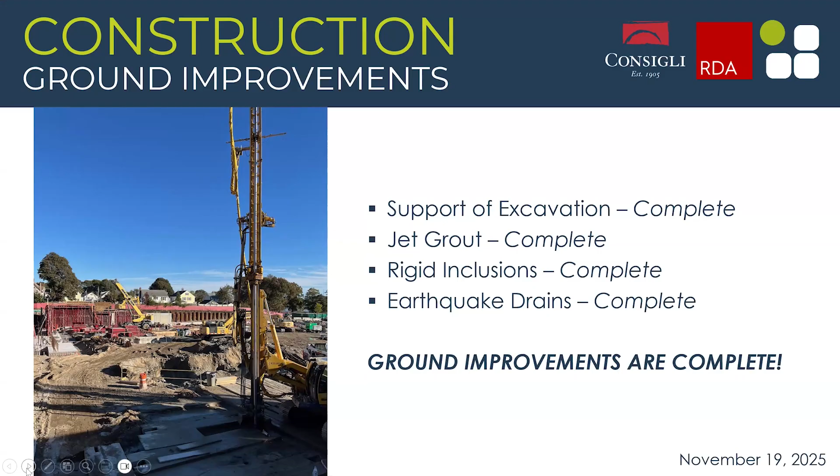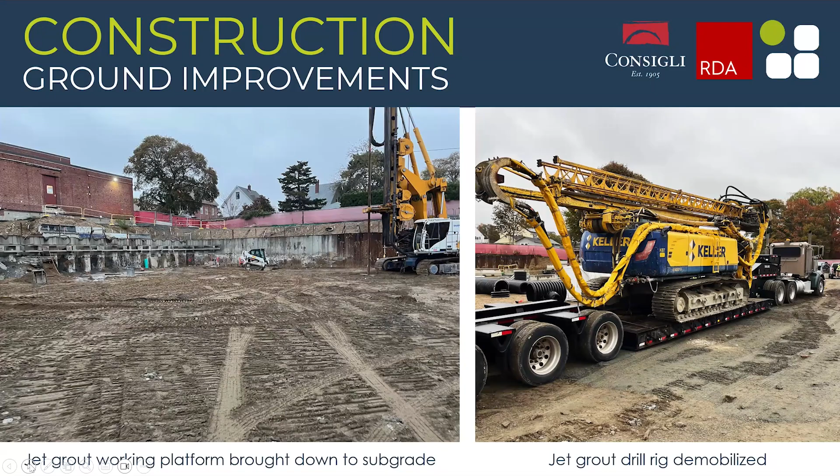These are a couple photos of, on the right, that jet grout rig being demobilized. That's now completely off site. On the left side, we had cut out the working platform that all that jet grout was installed at, brought it back down to the platform elevation needed to install the handful of rigid inclusions and EQ drains that we had left off in that jet grout area during the initial mobilization. That's since been completed as well. So both rigs in these photos are now off site, which is fantastic for us.

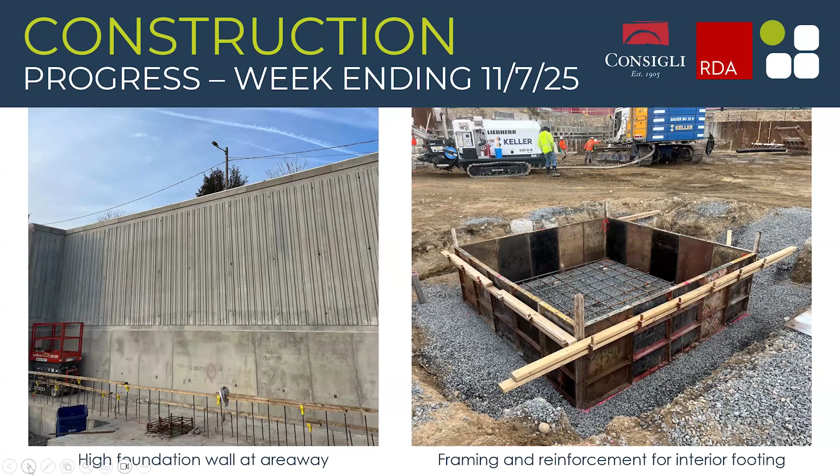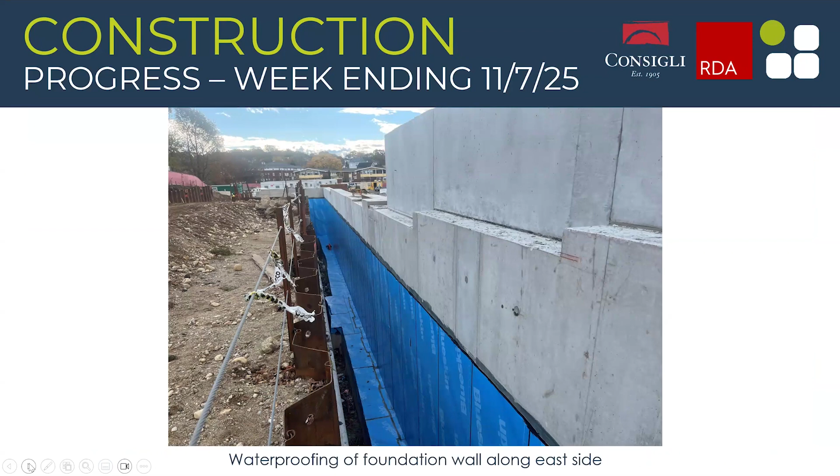We've also mobilized with the waterproofer. We've completed the waterproofing on the east side of the high wall between the sheet piles and the backside of that foundation wall. This has been done. The rep for the manufacturer of the product came out, inspected, and we're getting a report, but they were happy with the install. This allows us to get our drainage mat in, put our insulation in, and then actually start backfilling, which is another great step for us.

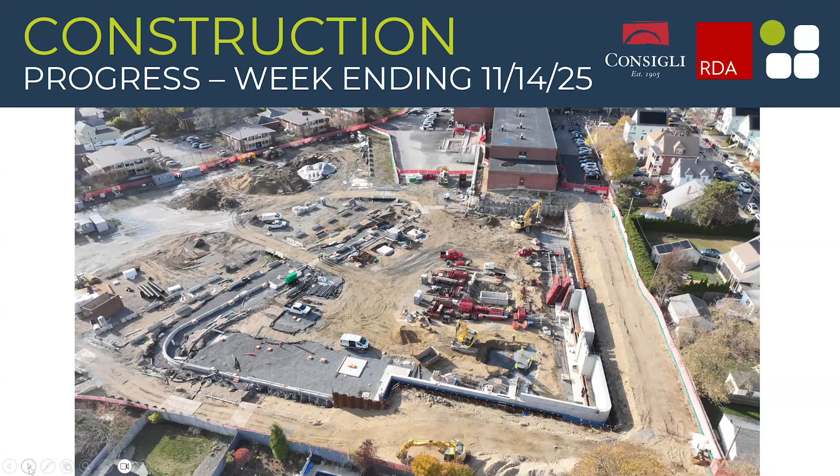You'll see some crane work happening, I believe the week after next. You'll see that crane back out, setting more formwork to do the rest of the high walls as we work out the rest of the concrete, to be done mid to end of December to be ready for steel.

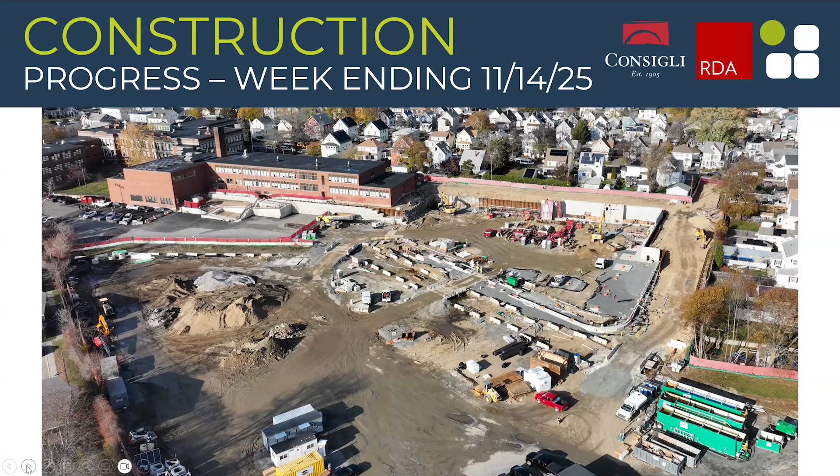We had a great site visit with the carpentry students from Lynn Tech. Something we've been working behind the scenes with the principal and guidance counselor there. Last Friday they came out, about 40 kids, with some fantastic questions. They had a chance to speak to a couple folks, our team, the Leftfield team, as well as some carpenters on site doing concrete work. I think it was great for them. We'll continue to do that.

Our next one is going to be in January with the metal fabrication kids. Once we get structural steel out there, we'll do the same thing, get a chance to talk to an iron worker, kind of see what their path was, what life was like to get to where they are. I think that was great.

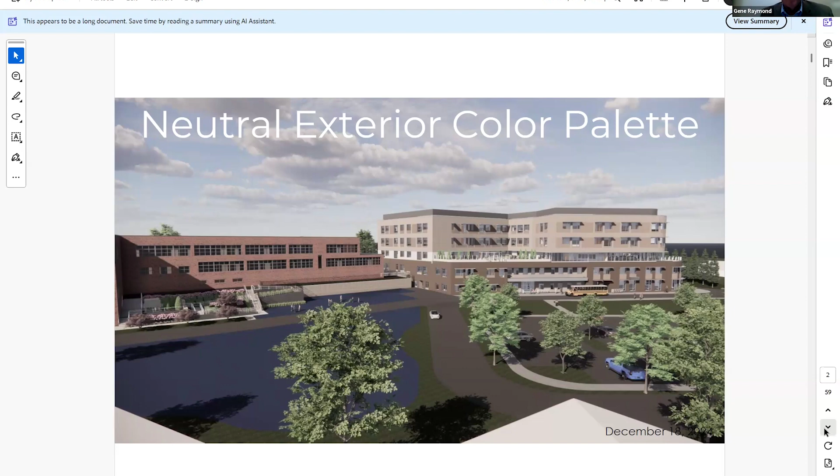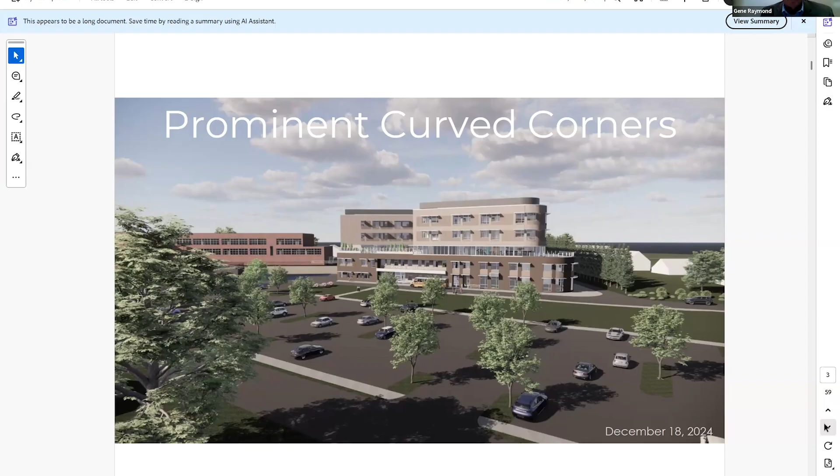If you go to the next slide, Lynn, you can recall from these exterior images or floor plans, the site lent itself to an L-shaped upper 3 levels, but we had corners we didn't want to have a big pointy prow on, so we curved the corners that overlook Flax Pond.

The outside is fairly neutral, as I said. The inside, we have most of the learning spaces around the perimeter of the building with windows and natural light. We have these cores in the middle of the building, and what we decided was to keep most of the hallways neutral, which you'll see in the slides as far as wall finishes.

But on these cores, we really emphasize that there are different cores. We have a 5-story building, and by using different colors we'll help people navigate the building. Obviously they'll know where they're going after a while, but we're trying to break down this big building into smaller pieces.

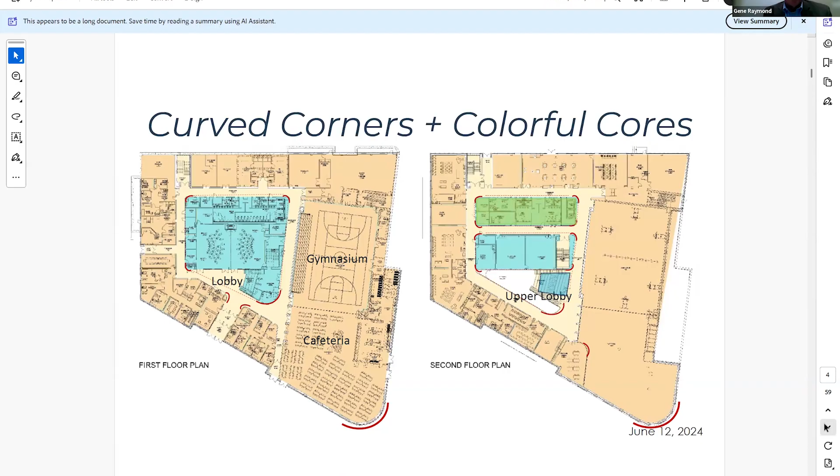So these are the first 2 floor plans, and you can see these different cores inside the building. You can also see these red semicircles. We don't have a lot of sharp corners; we've rounded the inside cores just like we rounded the prow overlooking Flax Pond. Next slide.

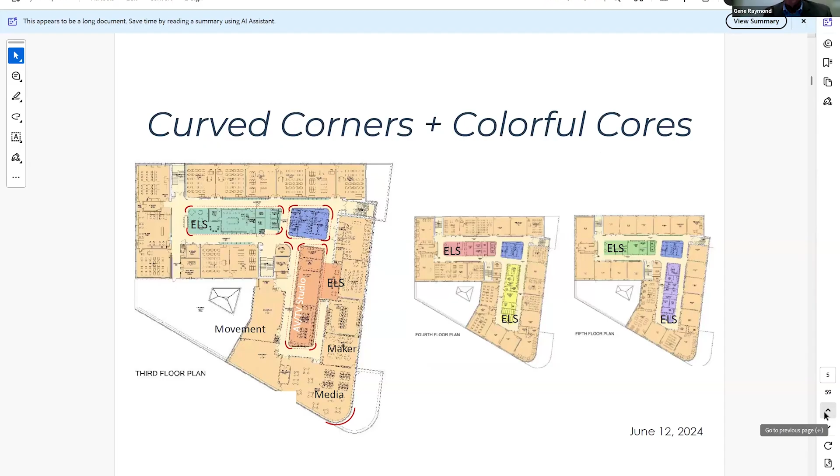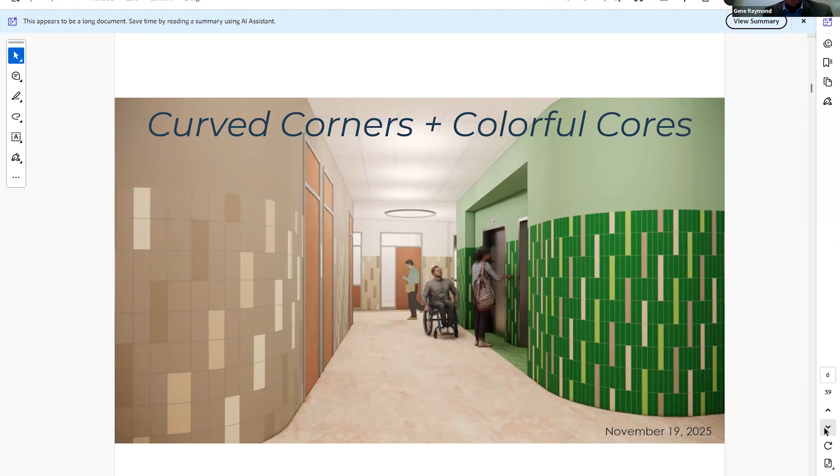On the left side, we have these toilet cores that stack on the upper 3 floors, and the wall at the back is a neutral tile color palette. The floors we've kept neutral also, because we're really trying to emphasize these interior cores, having different ones on different floors so people have their own identity and know where they are. You can see the rounded corners on the left and right in this picture.

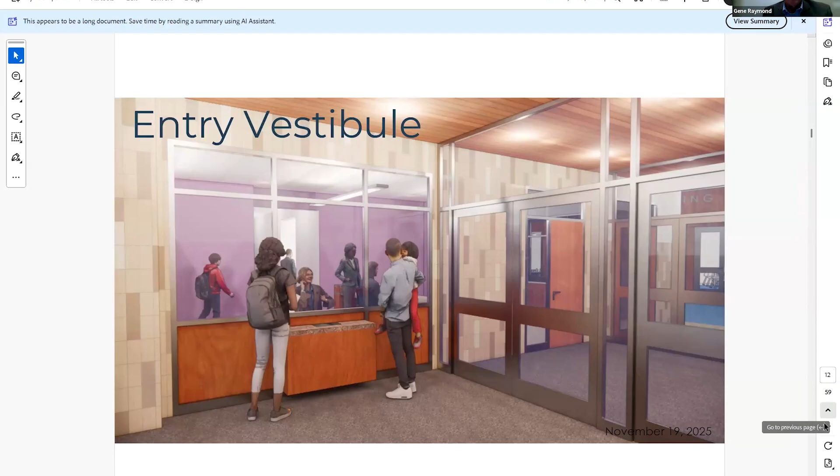You're going to see a lot of these blackboards, and I'm not going to go through every one in detail, but on the left side, going up and down in the vestibules, there's a wall-to-wall walk-off mat to knock dirt off your feet before you get into the school. We have that full height neutral tile pattern, and at the top, those linear metal planks.

I guess the stairs are on the right. We don't have any images of the stairwells, but they'll be very similar to what we did at Thurgood Marshall, which is ground face concrete block on the walls, very durable, stainless steel handrails so you don't have to worry about repainting, and rubber flooring for treads and risers. You could go to the next one, Lynn.

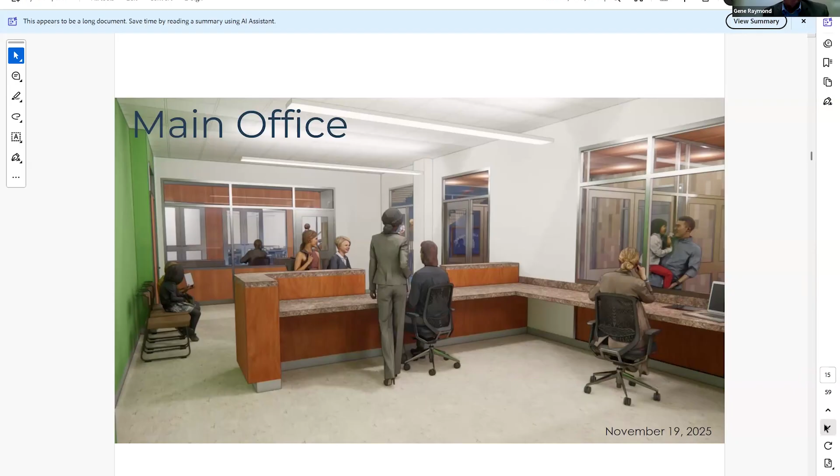If you were buzzed in, the door to the main office from the vestibule is on the left. But if you proceed straight, you're coming into the main lobby. For this, we thought the most appropriate calming color was blue, so this core in the main lobby is going to be blue.

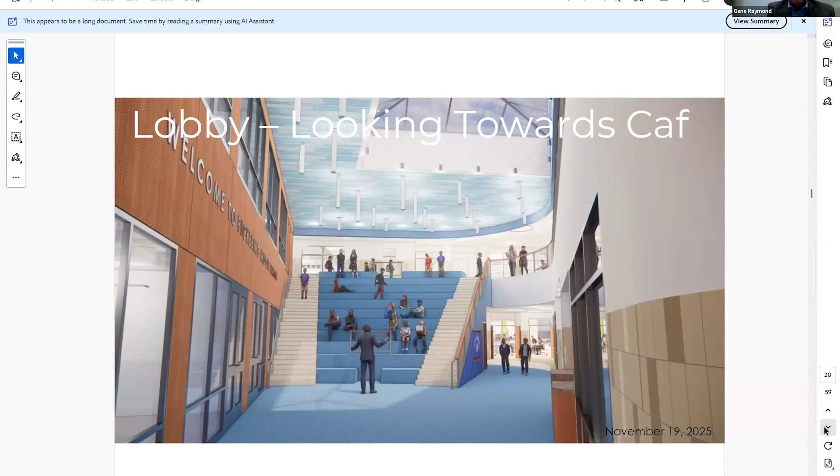So this is another view of it, at the learning stair. It's a 2-story high space in the lobby with a big skylight. On the right side you can see the neutral wall tile, but then between that and the stair, you're looking down the hallway toward the cafeteria.

The planks — when we have one of these colorful cores, in this case a blue core, we're using a lot of blue, but we didn't want the ceilings to just be one tone of blue and fairly uninteresting. So these metal planks will all be painted in a series of three different blues, and when we get to a green core, there'll be three different hues of green.

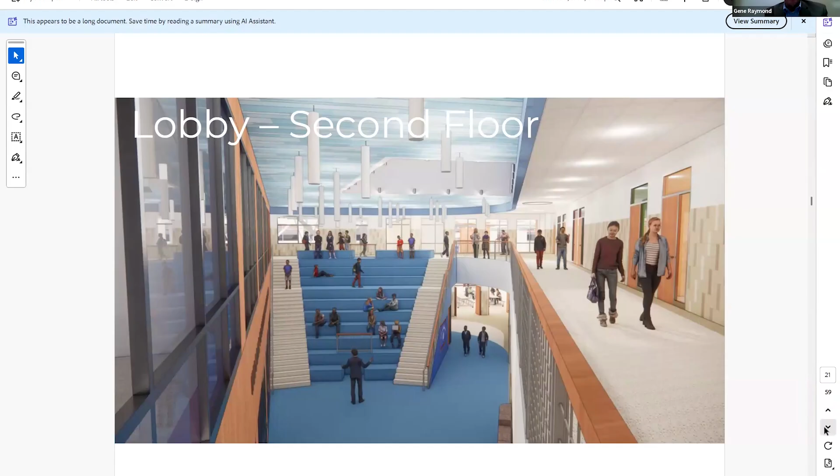This is the upper floor, upper lobby. Everything you're looking at, the neutral colors on the floors, is all terrazzo. So all the walking surfaces in the public areas on the first and second floor are this terrazzo.

You can see you've reached the top of the learning stair. You could go down to the first floor, or either way, left or right, head down a corridor. You can see wall tiles, blue on the colorful core, and neutral tiles to the left there.

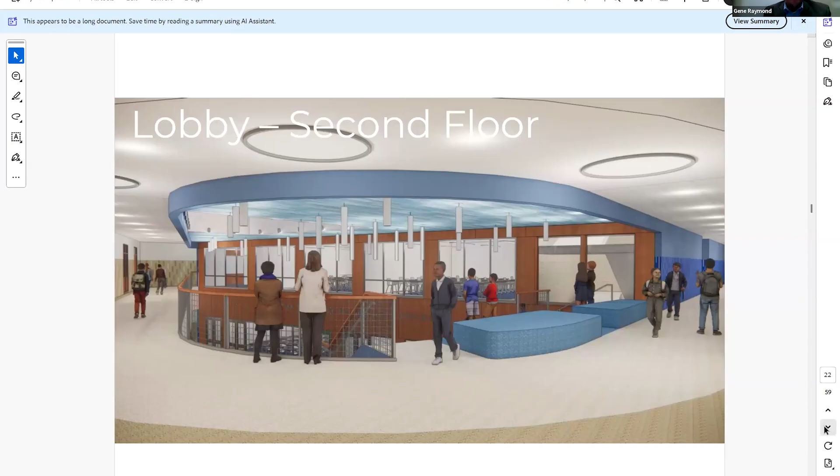So where we were standing at the top of the learning stair, which is on the left, there's windows that look down into the cafeteria. And if you went down the hallway where those kids are, there's windows that also look down into the gymnasium. What everyone is walking on is terrazzo, and all the tile on the wall goes up 6 feet. So everything you can touch is very, very durable.

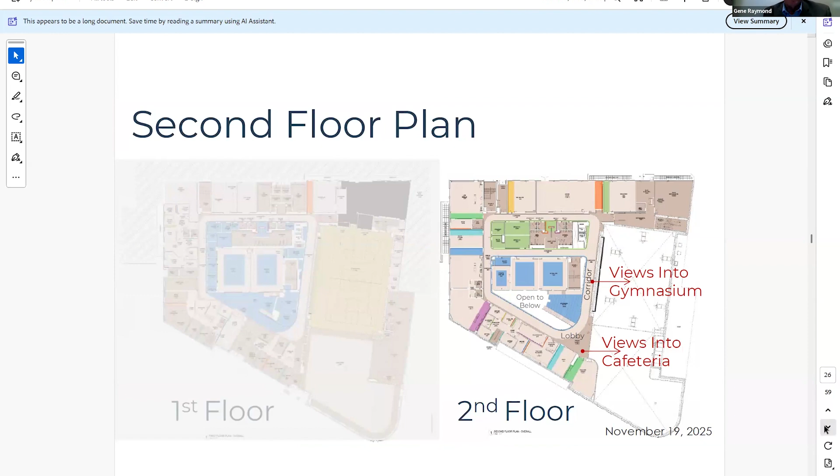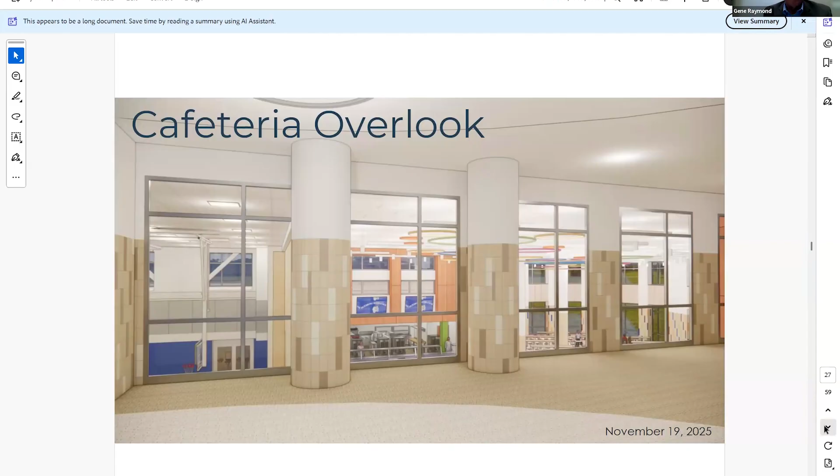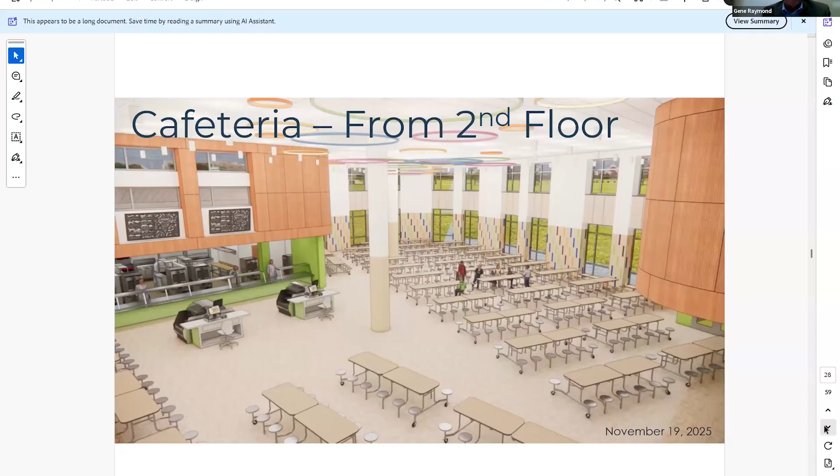I just wanted to point out the next two slides are going to be a view into the cafeteria from the second floor, and then a view into the gymnasium. This is what you'd see if you came up to the top of the learning stairs and looked straight ahead—you're in this upper lobby area. If you approach those windows, you'd be looking down into the cafeteria. And further down the hallway, you'd be looking down into the gymnasium.

So the gymnasium—we will work with the district on what color game lines are and how they want them arranged, but it's a maple floor. There are blue plastic bleachers on the left side, and the blue band that goes around the edge is either going to be a cherry door that looks like wood, or a full height wall pad.

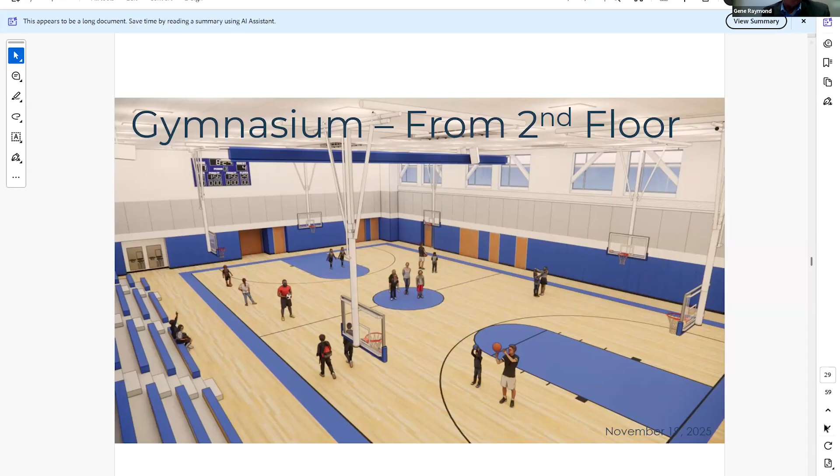Really, there's the wall pads of vinyl. The bleachers are hard plastic, like Thurgood Marshall.

It gets very repetitive, so I won't spend a lot of time on these, but this is the gym when it's being used as a gymnasium. Above the blue wall pads, there's a white band around the edge—that's all cement panel acoustic panels. They're very rugged, but we have acoustic ceiling tiles in the ceiling too. We have those on the wall, so the idea is that we don't want a lot of sound bouncing around. We want to be able to hear ourselves talk when we're in the gym.

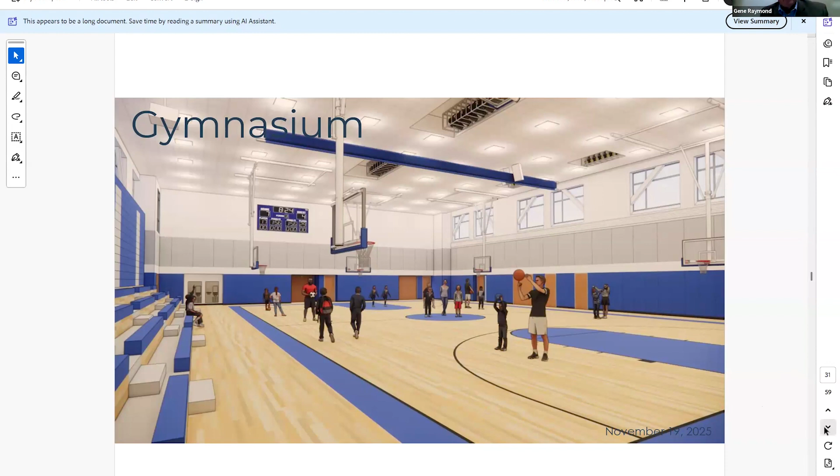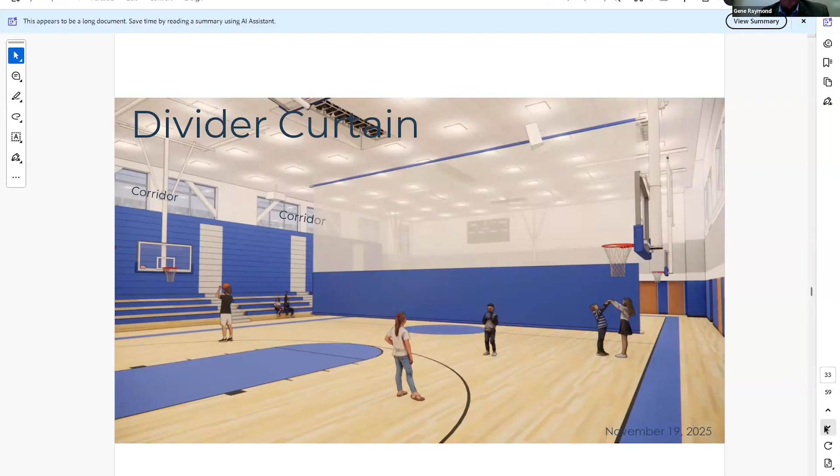There's a drop down curtain that will divide it into two sections, if you have two sections of phys ed. From the same area in the gym—we don't have a stage in the cafeteria. We use the gym and put a lot of bleacher seating and then room for floor seating.

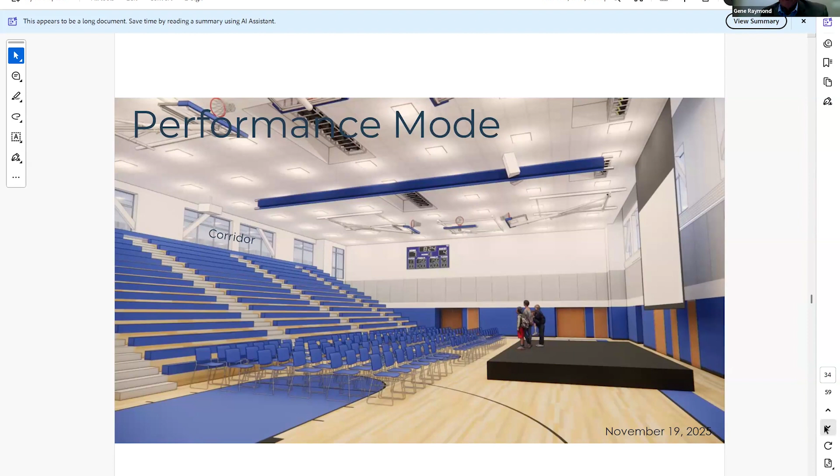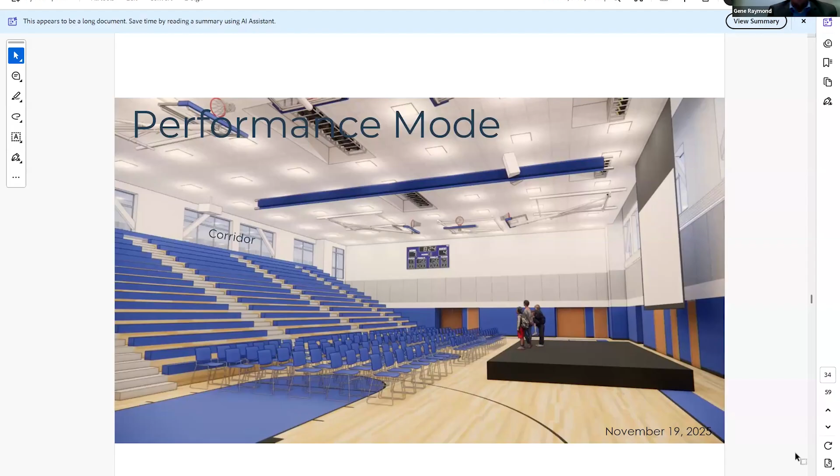There'd be a portable platform, which is that black rectangle on the right side. There's a projection screen that would come down, and a very heavy duty projector over by the corridor windows. Up in the ceiling, those black rectangles are all the theatrical lighting. So we're using the gym as the large performance space in the school, and that's why we have so many bleachers.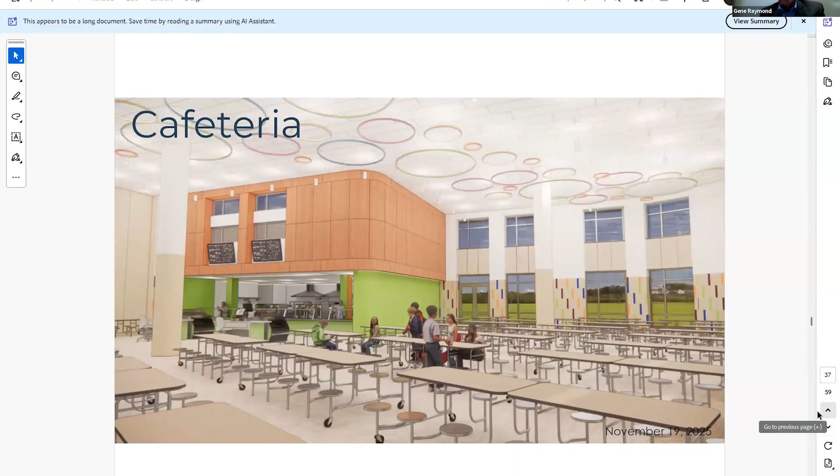If you're looking back toward the lobby, we also have a roll down screen here, and there's a projector here so that the cafeteria can be used for more than just eating—it could be used for smaller presentations.

On the right side, it's hard to see behind the column, but if you see the word lobby, to the right of that is a folding partition. It's tall and long, and it can be opened. If you do open it, you'll have just a big, huge space between the gymnasium and the cafeteria. So for a big community event, you have the cafeteria option, the gymnasium option, or you could combine both rooms into a large open space.

When we get to the upper floors, anytime you see the letters ELS, it stands for Extended Learning Space. It's pretty much corridor space, not enclosed. The corridor just kind of expands into this open space where group projects or pull-out services could be provided.

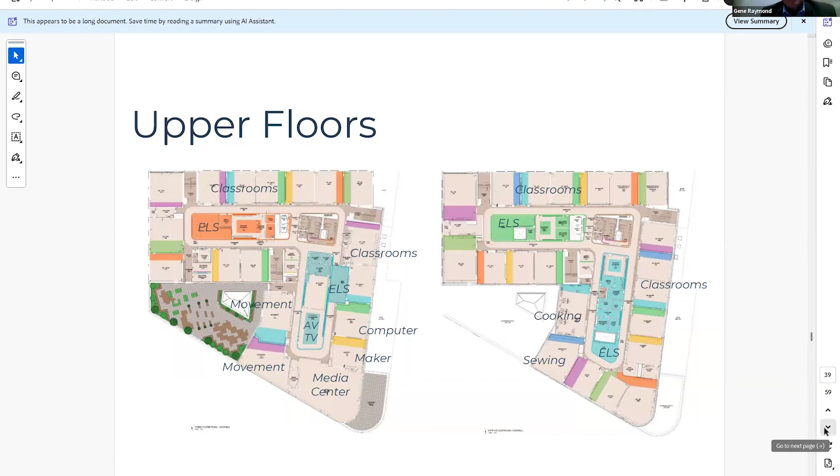We'll show you pictures of those, but those are all the color cores. The media center's on the 3rd floor, and these windows are looking out over the parking lot, over the Flax Pond. We have again the theme of circles and arcs. We have soffits, and please don't react to the colors - this is all about how we want to organize things. We'll pick out colors that are soothing and appropriate. We have these colored soffits, painted gypsum, and acoustic ceiling tile up in them.

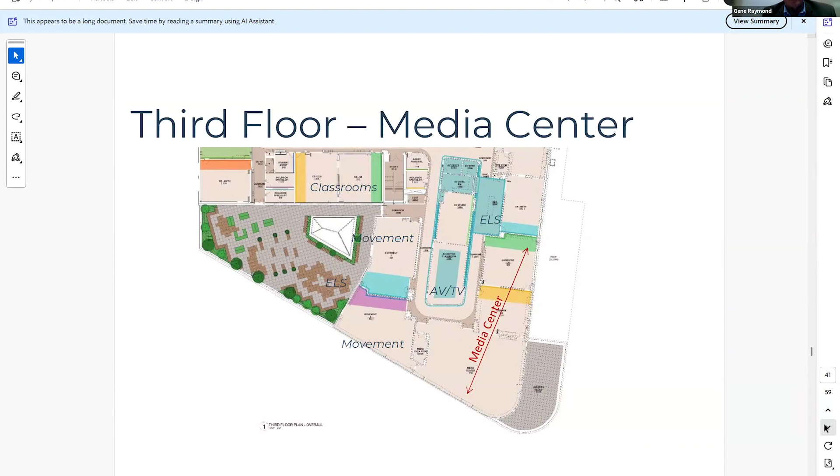Just to remind people, the media center - we just showed you the big room where the word media is - but there are walls that open up because those 2 classrooms above it, one's a computer lab and one's a maker space. So the media center really flows and does a lot of different things. We're pulling the different colors in. The media center is carpeted, so you can see the pattern - we're kind of neutral, but a little bit of green in what we're proposing.

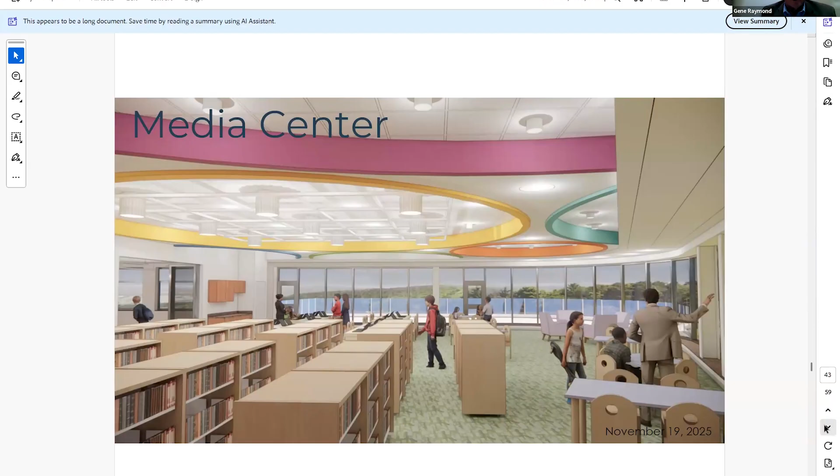We're showing a lot of bookcases, but this is just generic - we really have a big open space. Any of the furniture you're seeing has not been purchased, it's not even under contract. So we still have a lot of work to do with the school department as far as fine tuning what goes into this space.

So when you get to the colorful cores, this happens to be a green core. It's an extended learning space, so you can see it's taking advantage of the corridor space and then widening it. On the right side, there's a skylight that comes down through the top 3 floors, but there are no floor openings. The shaft is always enclosed by full height glass, so there's no sound transmission or anyone throwing things down a light well. This is all rubber flooring at this point. You can see the green ceiling, all the metal tracks are different shades of green, so it has a little more texture.

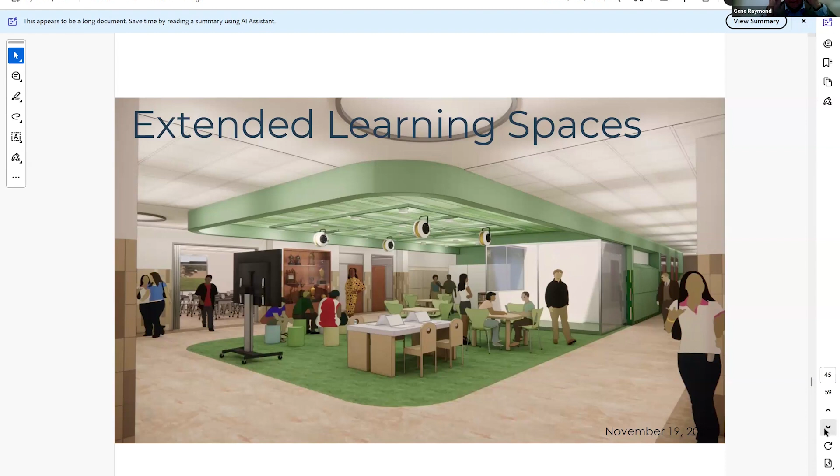On the right side, it's not easy to see, but there's a man with a brown jacket, and to his left are banks of lockers, and you can see anything around the perimeter of this space is the neutral tile pattern.

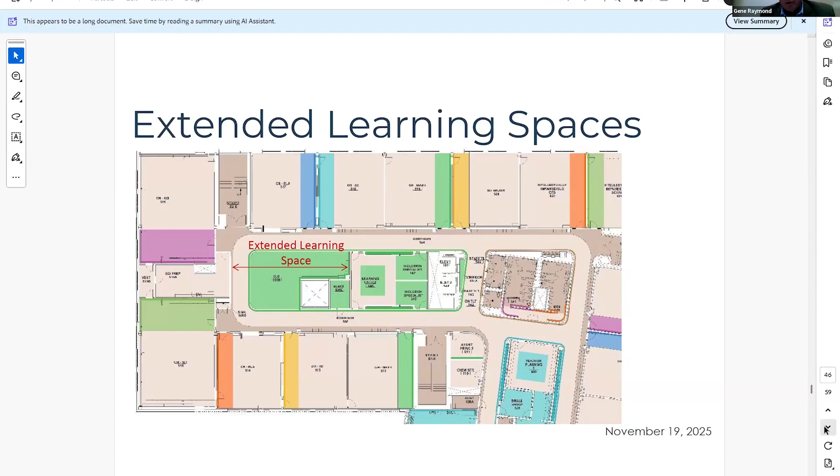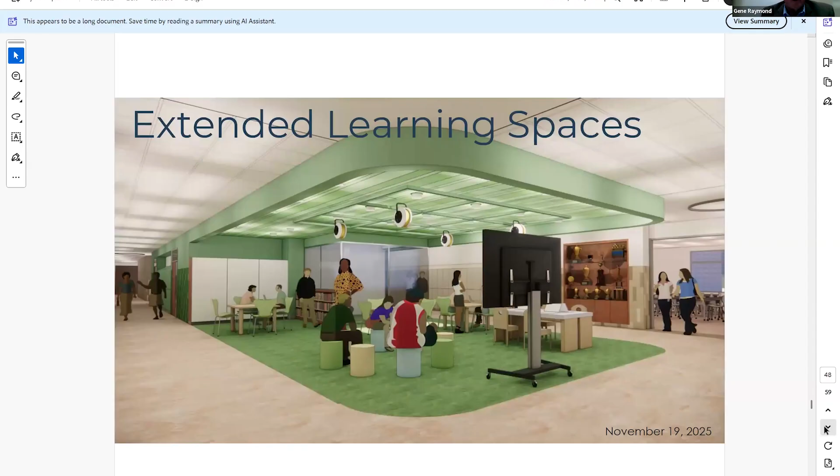But each of these classrooms, when you walk in the door, it's all rubber tile, but we're proposing that we use different colors to denote the different classrooms. So you might look in a classroom and see an orange floor, or a blue floor. So again, we're just trying to break down the big space. We're trying to use all these same colors, and this is just another view of one of these core areas.

So when you look into a classroom, maybe we use the purple tile here, but when you look in, you'll see the teaching wall has an accent color, and the floor will also have an accent color, which is meant to draw attention to the activities going on the teaching wall. When you get into the classroom, you get the teaching wall on the left, another accent wall on the right. We think that's a fairly simple way to give each classroom its own kind of color identity.

This is just looking back, but the hallway door is on the left and the door on the right was to the next classroom. Then the final thing is we have these toilet rooms that have girls, boys, and staff bathrooms in them. They're on the left here, shown with the neutral tile.

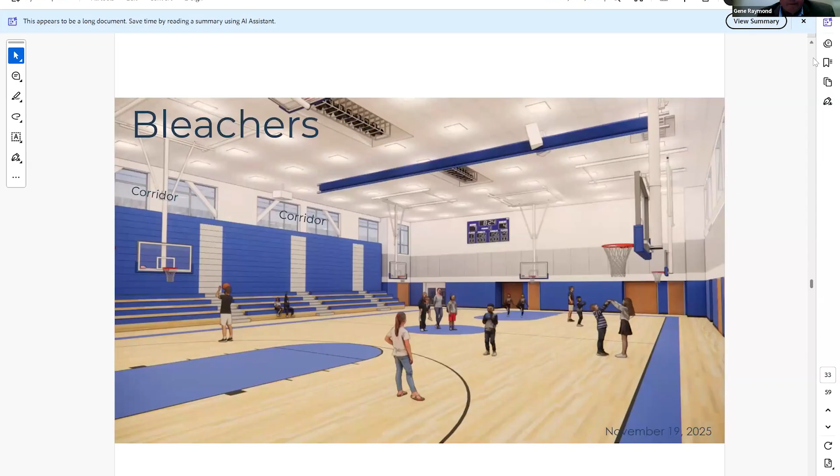Oh, well, we could go back to the first floor plan. I think it would be like one of the first. Yeah, like where— oops. Thank you for your patience, Lynn. There we go. I don't know if you can blow it up. Lorraine, see where the white lettering says black box?

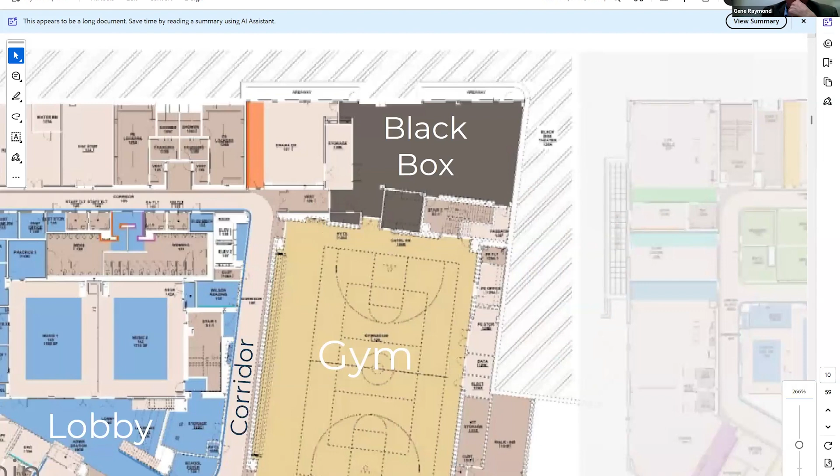Yep. Yeah, so the next classroom to the left with the orange stripe is the drama classroom. And then to its left are the PE locker rooms for boys and girls, and then there's separate changing rooms and showers. Okay, all right, thank you.

So they'd come out and they'd go around the corner into the gym. They're fairly close to the gym. Yep, okay, doke.

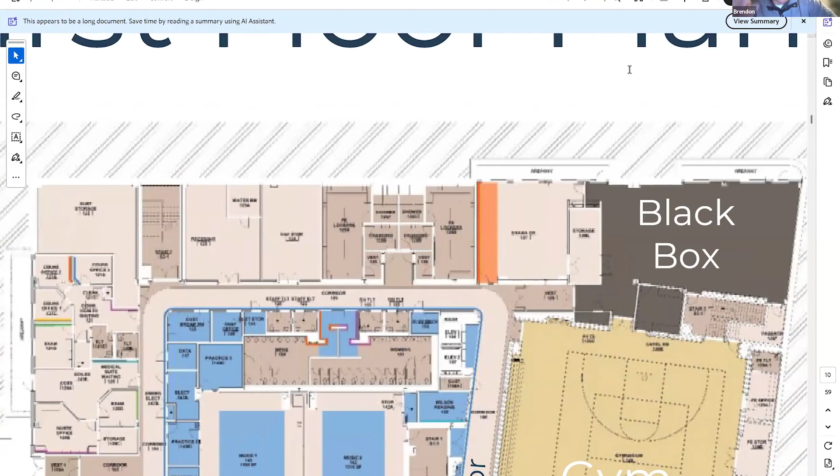Brendon? Hi, Gene, Brendon. So I'm not going to comment on the colors, but just if you go back a few slides, sorry Lynn, to go all the way back—my comment is kind of like that tile, how you have that pattern going in. It just seems like it's really busy with all the different accent colors that you have.

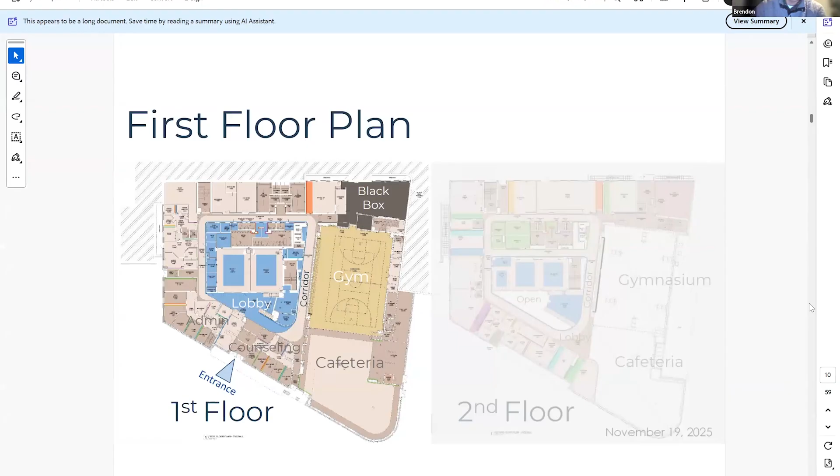I'm not sure which slide you want me to go back to. The corridor with the bathrooms, and you have like the green, I think, and then the purple, and then the field. I don't know if it's the rendering, but everything kind of seems like it's really busy, and then it kind of clashes a little bit to me.

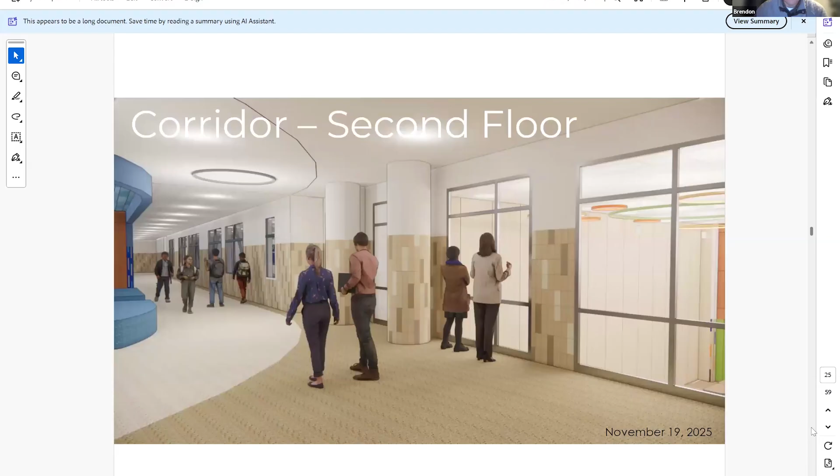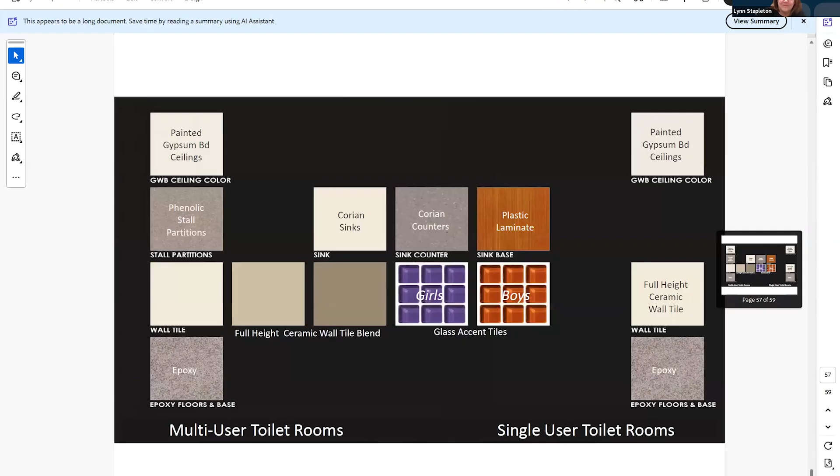I think it's maybe the last slide, probably. Oh, the orange and purple slide. Yeah. This one? This slide? Yeah, there was another one with the corridor, a different angle—maybe two slides before it. There you go. Yeah, so this one.

So it's like this tan, which is your field color, and then you have the beige color on top. And then over here, on my screen it looks kind of pinkish and purplish on the bottom. I just think with all of these, the concept, because I feel like you have it everywhere throughout the building, it just kind of gets really busy and takes away—there's really not an accent wall because my eyes go into everything. So that's kind of my comment.

And then also the cherry wood that we're using throughout—I know you mentioned that you're using that because of Thurgood Marshall, but it just seems to me kind of dark and dated. I think it's successful in the cafeteria views, and I think that might be just because of the volume and the white there. But those are just my few comments, and I know you're going to refine the colors throughout, but those are just kind of my initial comments, and it kind of goes throughout the entire building.

Thank you. Thank you. Let us think about that and get back to you on it. All right, perfect, thank you.

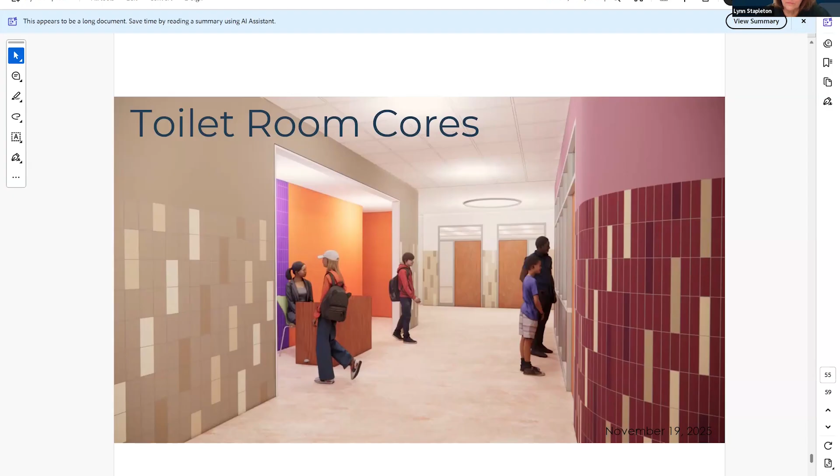Are there any other questions? Okay, we'll be coming back to this later on as furniture gets selected and everything gets solidified, so you'll have a chance to see it again. I'm going to put the presentation back up.

So we've talked a couple of times about putting in empty conduit to the parking lot area for future solar. While that initial investment for the conduit was only around 55,000, as we looked at it more, because of the soil conditions in this area being unsuitable and not soils we want to disturb much due to debris and contaminants below the parking surface area, we thought that given how we've stretched and exceeded our budget on construction, it would be highly unlikely that later on we'd be able to put the solar canopies in. So we're reporting back that it's our collective team's recommendation that we not pursue this any further.

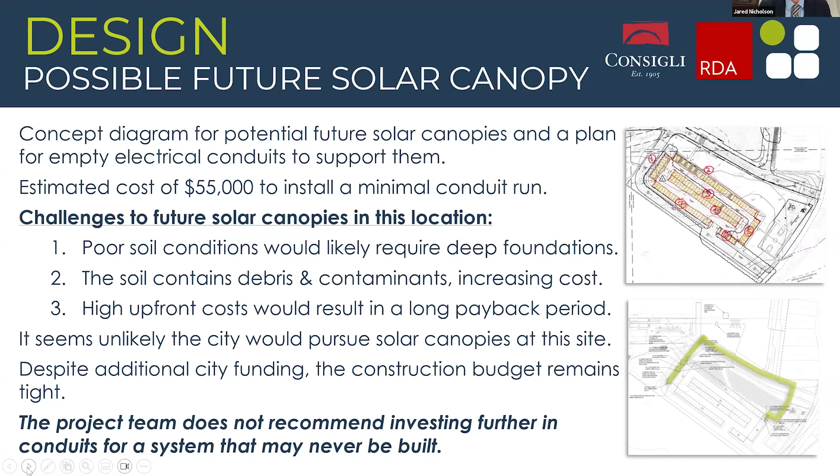Just in terms of the overall construction schedule, we are looking to complete all the foundation work by December 5th and start steel erection by December 22nd. I don't know, Brandon, if you have anything else to add to that.

Okay, thank you. In terms of our overall schedule, we're still targeting a mid-year move with the school opening January 3rd. Nothing has changed there from the last time we spoke. In terms of the SBC meetings, our next few are December 17th, January 14th, and February 18th.